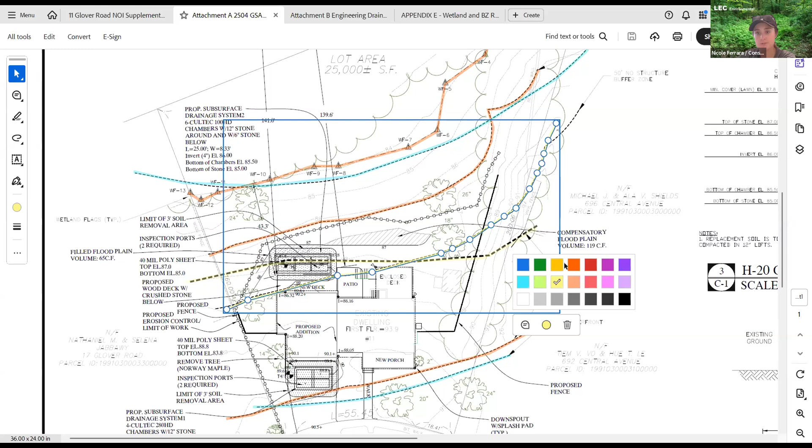So I've pulled up the plan. In orange are the buffer zone lines for BVW, in blue are the riverfront area setbacks, and in yellow we have the bordering land subject to flooding. Actually that should be orange, not yellow. So like I said, we did revise our plan.

We included the addition of a fence, where my cursor is, in black. It's going to go along the portion of the property line, connect to the sides of the house just to enclose the lawn area within the backyard. That fence will be put in the lawn. We also added a little porch in the front here, as well as shortened up this patio in the back. So those were just some minor changes that we added.

In terms of the infiltration systems, we've upgraded our stormwater management to include 2 infiltration systems. We have one in the backyard within the existing lawn, and one underneath the driveway. We have Al Gala on board. Al, would you like to add any details regarding the stormwater management?

Good evening, Commissioners. Al Gala from Gala Simon and Associates. So this is a revised plan, as Nicole has stated. Our original plan had the new driveway as porous pavement, allowing water from the driveway itself to infiltrate and at the same time offset the increase in impervious area. We later found out that the town of Needham has specific requirements for additions, that you have to infiltrate adjacent roofs to the addition. So that's what this design reflects.

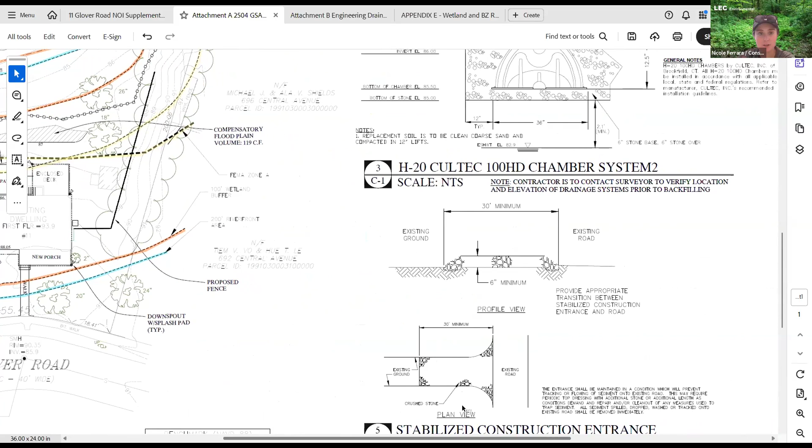It will meet the requirements of the zoning of Needham also. Great, thanks Al, took the words out of my mouth with that compensatory flood storage. Like Al said, we did include that to offset the infiltration system, and we have our flood fill comp calculations right on the plan.

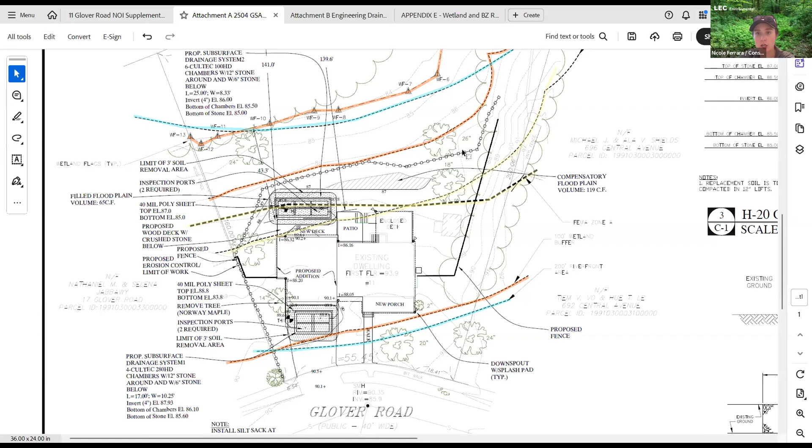And then I believe that's all the changes that we have. Just to refresh, for our mitigation we're providing stormwater management, erosion controls around the limit of work, inlet protections with silt sacks at the catch basins, and our wetland and buffer zone restoration plan presented at the last hearing, which is about 4,280 square feet of restoration of both the wetland and the 25-foot buffer zone. We're proposing permanent demarcation of that along the new lawn edge as shown on the plan. That just about covers it.

I'm happy to turn it over to answer any questions. Okay, thank you, Nicole. So Deb, do you have any comments? No, thank you for going over the changes. I don't think I have anything. All right, let me ask the commissioners. Any commissioner have a comment?

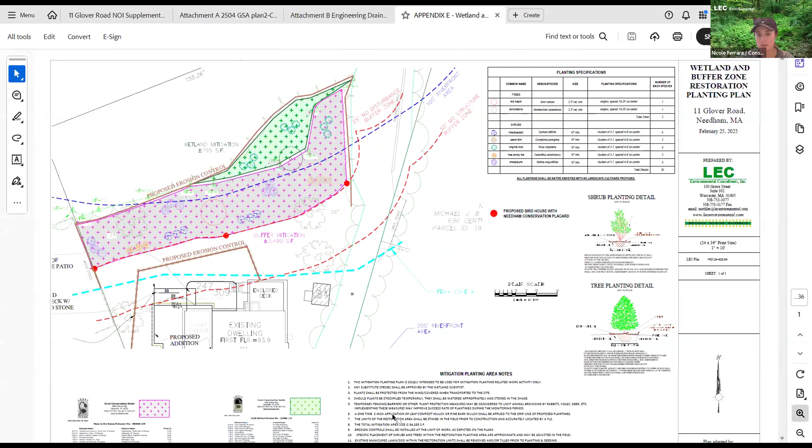Raise your hand. Fred? Yes, I can't remember, did we already see the planting plan in terms of species going in there? I vaguely remember that we did. Yep, I can zoom in so you can see it. We have all native species with no landscape cultivars. We have 2 trees to replace the 1 tree we're proposing to remove, and then 30 shrubs, and we're going to install a native fac wet meadow mix and a mesic to dry native pollinator mix.

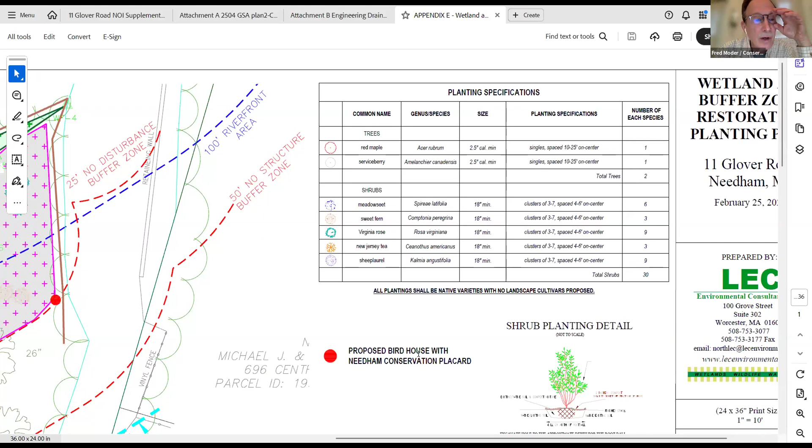Okay, what's the tree that's being compensated for, that's being taken out, what's being lost? Yep, it's a Norway maple, the one that's next to the addition. Okay, looks good. Thanks, great.

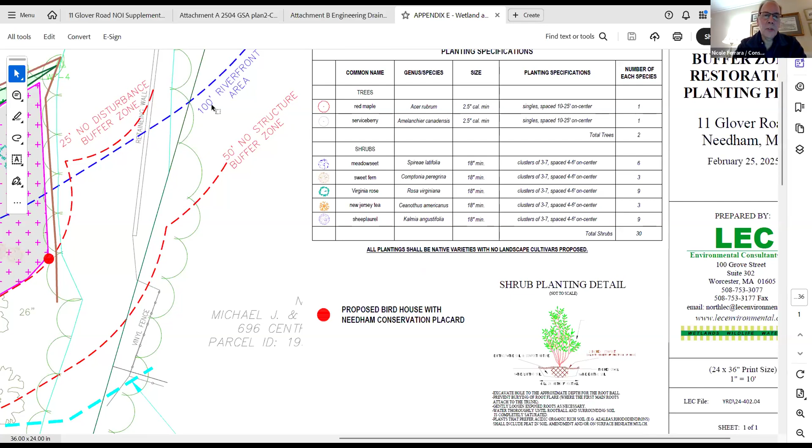Anybody else? I just have one question. In your submittal, did you do a soil test pit? I can respond to that. We did 2 test pits, pretty much at the location of our drainage systems, and you'll see them marked with, they look like targets. So the right front is test hole 1, the back is test hole 2. Okay, and yeah, I think you had a report there, right? Yes, the information is on the plan, test pit information. Yep, okay, that's my only comment.

Is there anybody in the audience that has any questions? I don't see anybody with their hand raised.

So, I have to draft this still, so it'll be ready on the May 9th hearing. Okay, so if that's the case, then we need to continue this hearing to May 9th.

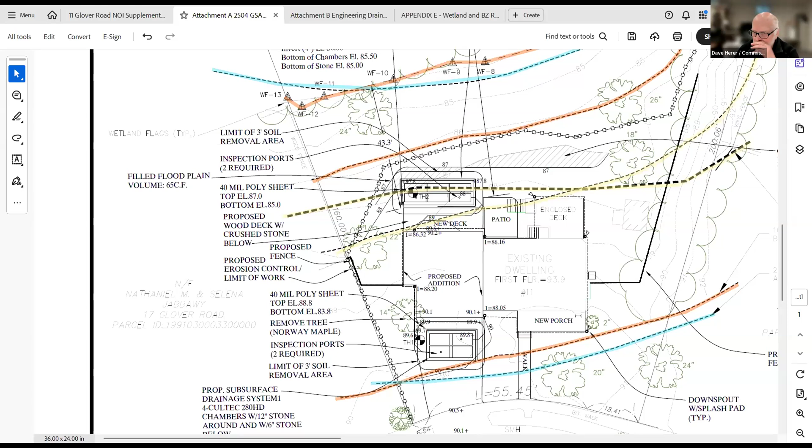So can I have a motion to continue the hearing for 11 Glover Road, DEP file 234-946, to May 9th? Motion to continue, I second. Okay, let's vote. May 8th, yeah, all right, May 8th. Bill, aye. Reade, aye. Sue, aye. Fred, aye. And chair votes aye.

All right, thank you. All right, great. Thank you, have a good evening. Yeah, good night, thank you. Okay.

Next item on the agenda is 72 Valley Road. It's a continued hearing. I believe the issue was we were looking for more detail on the grading of the site and also a listing of the species and size of the trees that were proposed to be removed.

So, Karen, hello Karen. Yep, I'm here. So we did revise the plan, we showed the topo. I can put that up if you'd like. Can I share my screen? Yes, please. Okay, here we go.

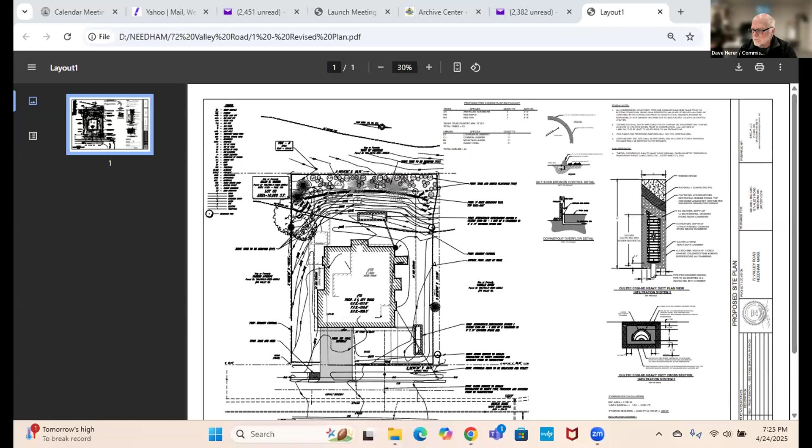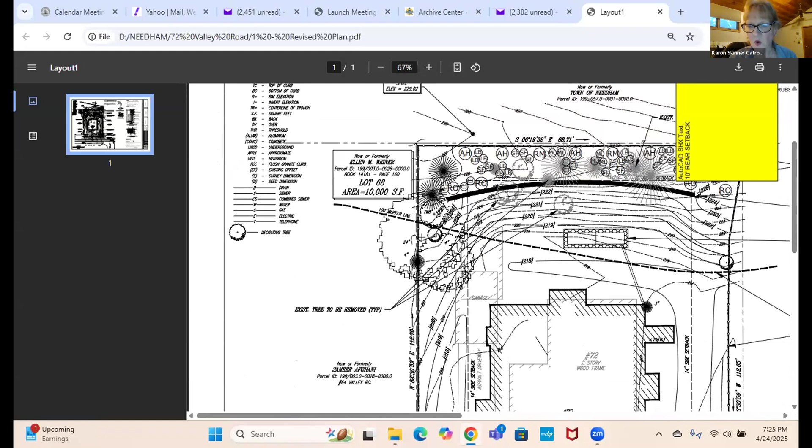So we also had trees outside the buffer zone, so we put all the plantings inside the buffer zone. You can see we're showing plants all back behind this wall. And I do have a planting list on here. So these are the plants we're proposing.

So, and I did go out and take a look at the trees to be removed. There's a 12-inch pine, 4 10-inch pines, 2 8-inch cedars, 2 6-inch pines, and a 10-inch oak to be removed. So basically pine and oak, a couple of cedars. Okay.

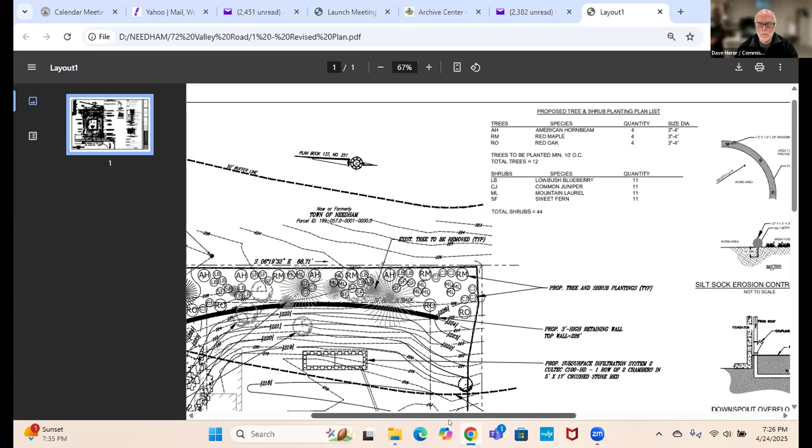Deb, do you have any comments? No, I think the planting plan looks good. I think with the topography, you have a much better idea of the existing site conditions. Yeah, any commissioners have any final comments?

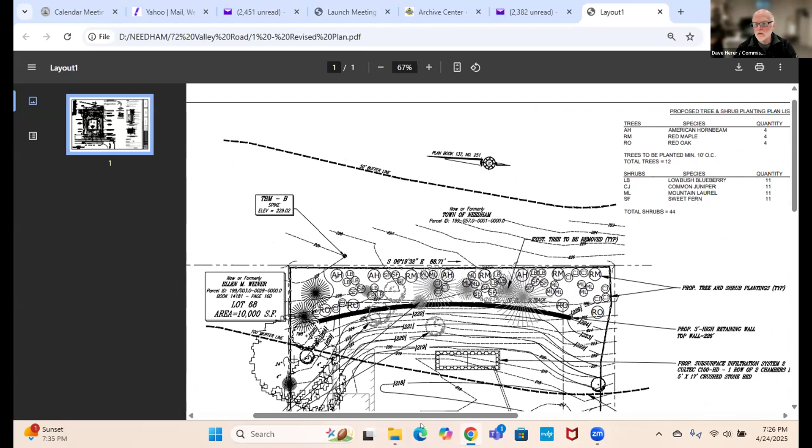Fred, is that planting area pretty wet, or is the red oak suited for the amount of moisture in the soil? It's not wet at all. Okay, thank you.

Reade, you had a comment? Yeah, the planting plan shows a size diameter, but it doesn't show caliper, so I want to make sure those trees meet the required caliper under our tree policy. 2.5, right Pilar? That's the minimum?

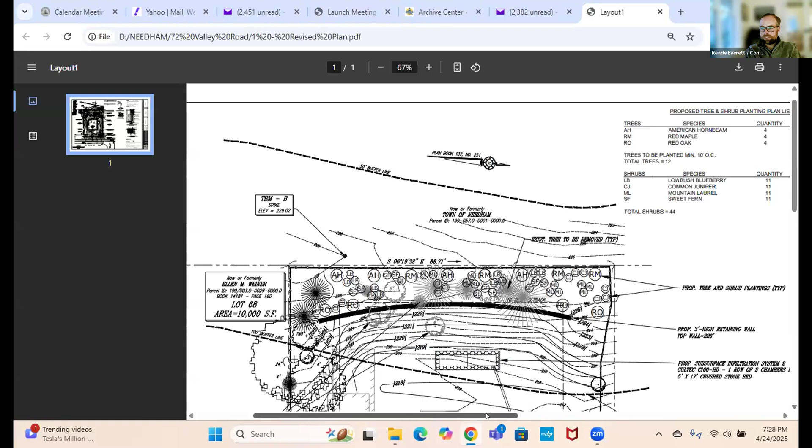Isn't that pretty much the same caliper and diameter? I think it's the same, yeah. Oh is it? Okay, pretty close. But this planting plan lists the height of the tree and not the diameter. But it says size diameter, I think, right? So I don't know, but it says size, are those inches or feet? Yeah, that's why it was unclear. If we have inches. Oh it is inches. Okay, that's fine then.

I think everything looks good. There's no other comments. Is there anybody in the audience that has their hand up? I don't see anybody. I also have to draft for the next meeting, we just got the plan a couple days ago. Okay, alright, so

Can I have a motion to continue the hearing for 72 Valley Road, DEP file 234-950, to May 8th, 2025? Motion to continue. Second. Okay, let's vote. Fred, aye. Reade, aye. Bill, aye. Sue, aye. And the chair votes aye.

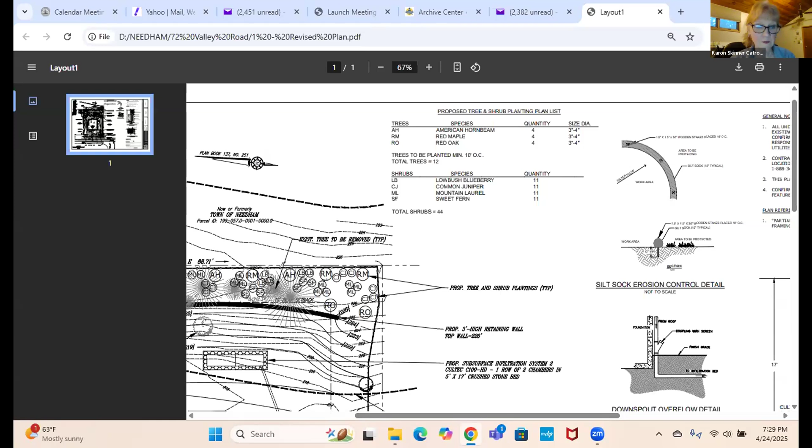1407 Central Ave, DEP file 234-948. This is a continued hearing. This is the maintenance facility for the town. I believe there were a couple changes that were made.

Somebody want to just review the changes with us? I'm Hank Haff, Director of Building Design and Construction for the town, and we have a team from Weston and Sampson that can go through those minor changes. Tyler, maybe you want to start? Yeah, I can give the summary. There are a couple of minor changes, and I'll just share my screen and walk through them visually.

Alright, so my name is Tyler Cofelice, I'm the project manager for Weston and Sampson, and this is for the fleet maintenance garage.

The couple of changes we made were: the original plans showed the generator in this location where the dumpsters are now shown. We did a sound study that showed it was too close to the property line, so we had to find a location back here and add a sound wall to help mitigate sound traveling from the site to the neighbor's property.

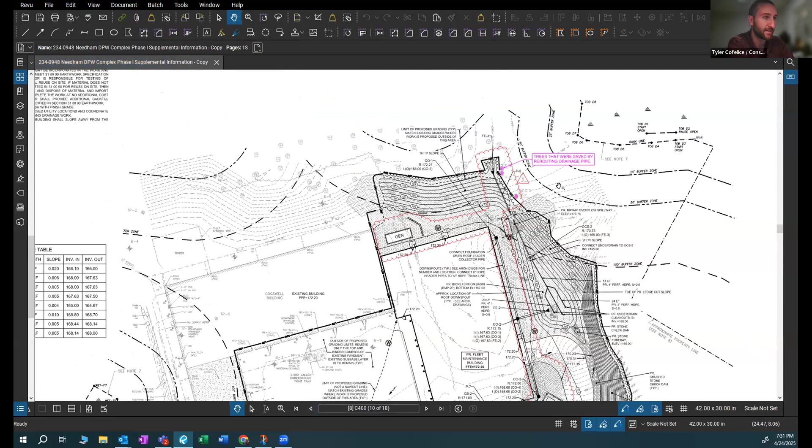And then, as mentioned previously, we did relocate this discharge pipe. That was to save a couple of trees, and I did highlight them right here. Originally these 3 trees were in the path of this pipe, it originally terminated right around here. So just by shifting the direction of the pipe, we were able to move it out of the way of the trees.

Those are the main changes. I believe it says there's an addition of a perimeter stone drip edge. Oh yeah, that's just shown right here. Okay, yeah. Okay, thanks.

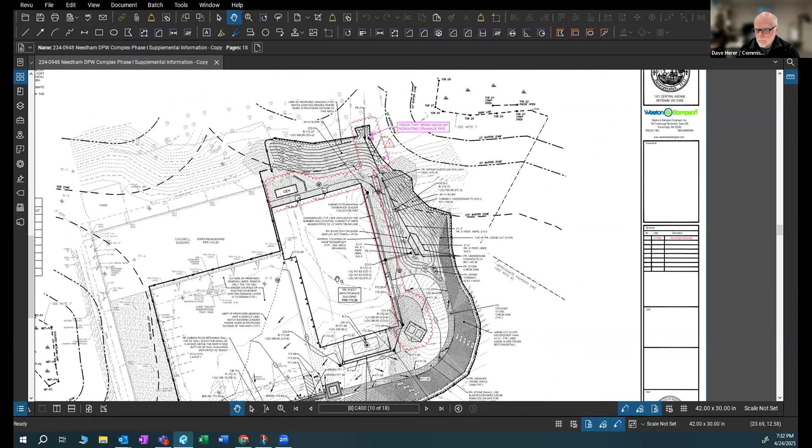Any comments, Deb? Nope, I do have a draft of this for us to review. Okay, any comments from the commissioners? Yeah, I think we had a pretty good presentation last time of the project, so it doesn't look like you're making any substantial change. No comments from the commissioners. I don't see anybody in the audience to comment, so I would

Suggest a motion to close the hearing for 1407 Central Ave, DEP file 234-948. Motion to close the hearing. Second. Okay, let's vote. Fred, aye. Reade, aye. Bill, aye. Sue, aye. And the chair votes aye.

And we'll take up the order of conditions in a few minutes. Okay, thank you. Thank you.

Okay, the last item on the written agenda is 293 Rosemary Street, DEP file 234-949. This is a continued hearing for notice of intent. Who do we have representing this project? Russ Waldron, me, yes. Okay, I'm going to pop the plan up here. Okay, Russ, thanks.

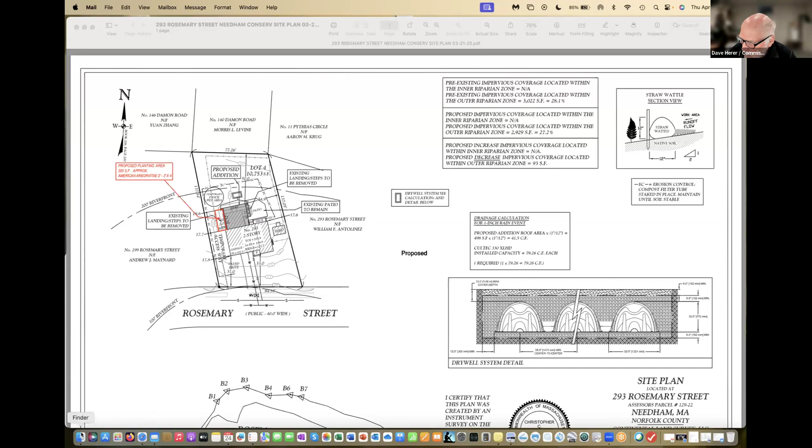Okay, if there's no further comment, and it doesn't look like there's anybody in the public audience, then I would take a motion to close the hearing for 293 Rosemary Street, DEP file 234-949.

So moved. Second. Okay, let's vote. Sue, aye. Reade, aye. Bill, aye. Fred, aye. And the chair votes aye.

Okay, thank you. Thank you. Thanks.

All right, there's no other listed items on our agenda, but I think we had a couple last minute things to discuss. One was the property on—yep, so we do have Scott Morrison, who's the wetlands person for 484 Charles River Street, to talk about their mowing schedule. Okay, go ahead, Scott.

Evening. If you recall, we had filed a notice of intent and received an order of conditions for the mowing at 484 Charles River Street back several months ago. At that time, I believe the commission's concern was relating to turtles, so they put a condition that indicated March would be the preferred mowing schedule.

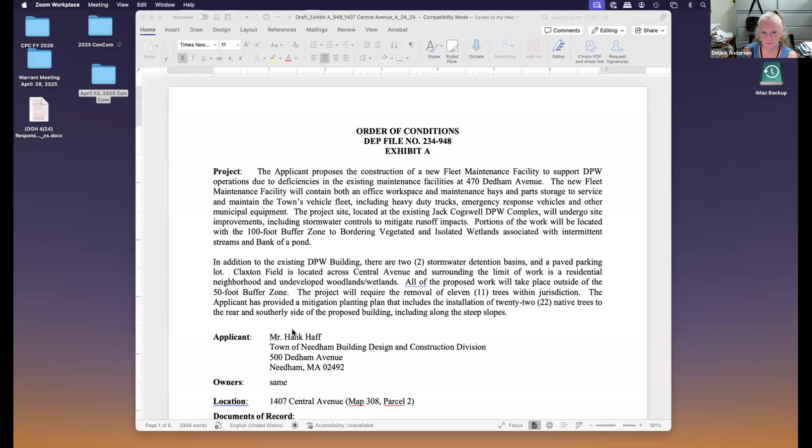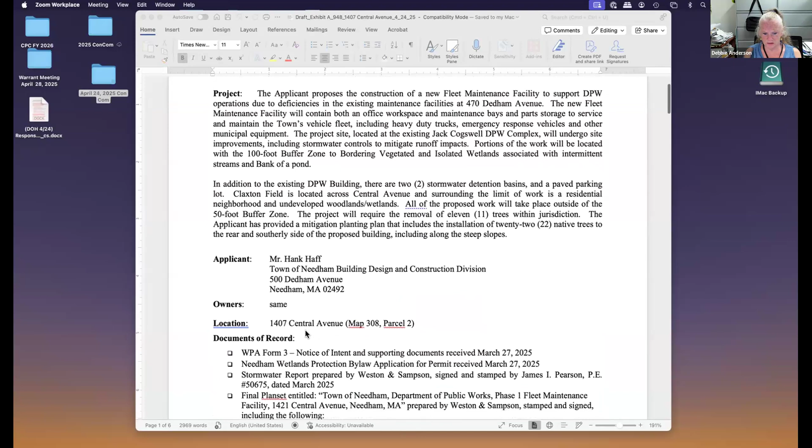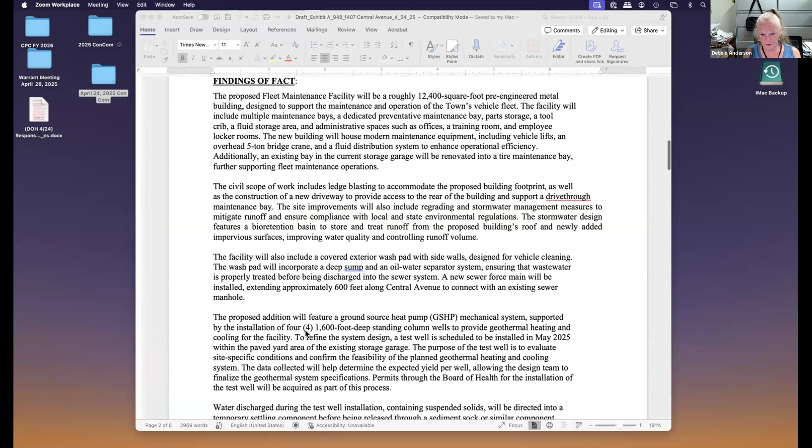So, long description, but they are doing no work within the 50-foot buffer. They are removing 11 trees and installing 22 trees. You can keep going. Yep, those are all the sheets. That is just the project description. Keep going.

So down the special conditions, Dave, you had drafted this new pre-construction special condition, number 7 there. I highlighted that because I added it - that they need to record the stormwater management O&M plan.

Just to be clear, that's something that is going to be in the revised stormwater bylaw or regulations, is that correct? Yes, we're just trying to get ahead of the game here.

Yeah, because we had it as they couldn't get their certificate of compliance, but we want to have it recorded at the registry right at the beginning, along with the order of conditions, right?

Right. Then I think they should mark the trees on site that they're planning to remove, and I can go out and take a look at those during the pre-construction meeting. And then we have tree protection to be installed and maintained around any tree that's to be maintained, that could be impacted during construction of the project.

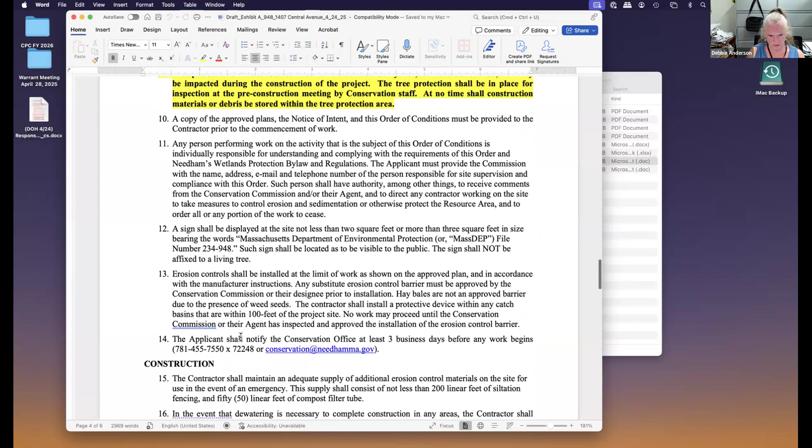Those might have been just that they should have extra erosion controls available on site, in case there's any breaches or issues with that.

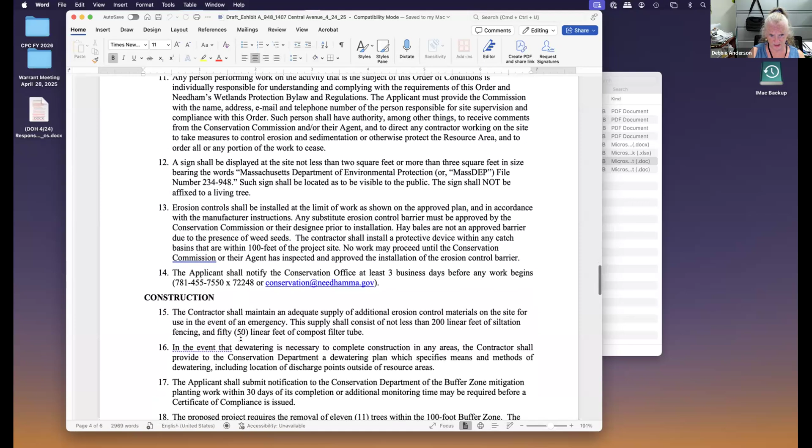Then let us know about the planting within 30 days of the installation. We have the planting plan, that has the 22 native trees they're going to be planting. Keep going.

Then we have the plant monitoring requirements. And the stormwater management system must be inspected and maintained in accordance with the approved long-term pollution prevention and stormwater operation and maintenance plan prepared by Weston and Sampson, and that should survive the issuance of the certificate of compliance.

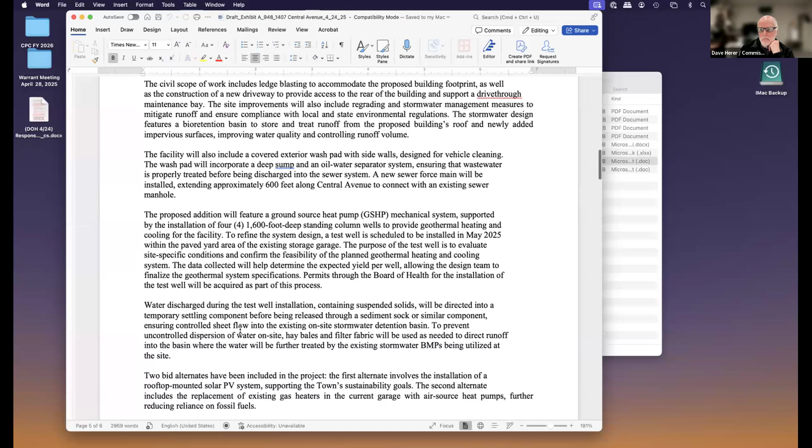And that's what I had, unless you wanted to add any other special conditions. Looks good. Anybody have any comments? Looks good. Okay.

All right, can I have a motion to approve the order of conditions for 1407 Central Ave, DEP file 234-948? Motion to approve. Second. Okay, let's vote.

Sue, Aye. Reed, Aye. Fred, Aye. Bill, Aye. And the chair votes aye. Okay.

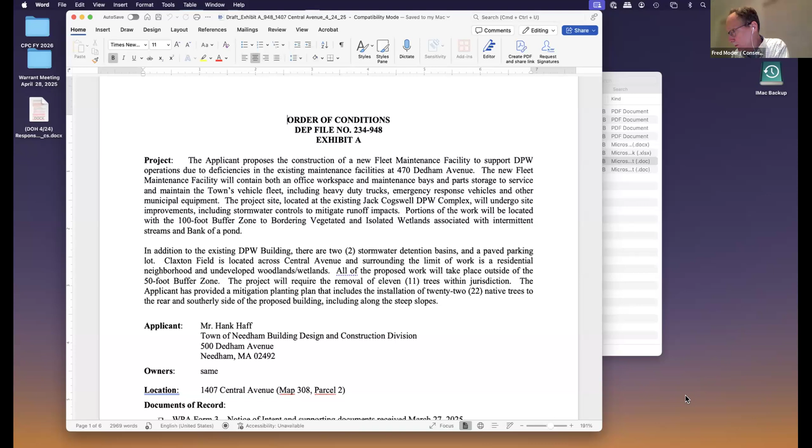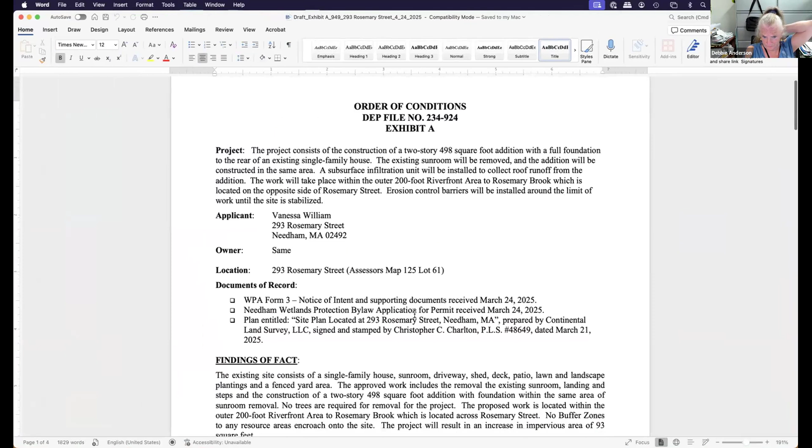Next one is 293 Rosemary. So this was a pretty simple project. As you know, they're removing the existing sunroom, putting in the addition. They added the subsurface infiltration, the mitigation planting area.

Special conditions, I don't know if I had anything worth noting besides our normal conditions. Did I highlight anything? Did they provide their maintenance plan, O&M plan for the stormwater? I don't know, I can't remember. Yeah, I can't either, I'll make a note.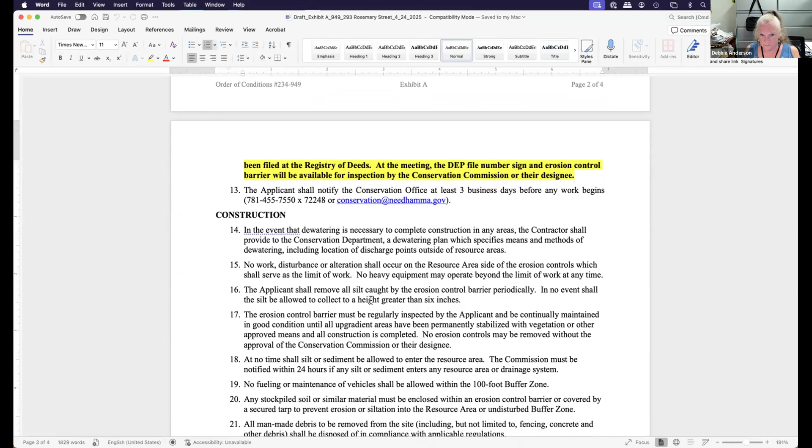Yeah, if they haven't, then they should. It should be part of it. All right, so they do still have to do their test pit, so I have that special condition.

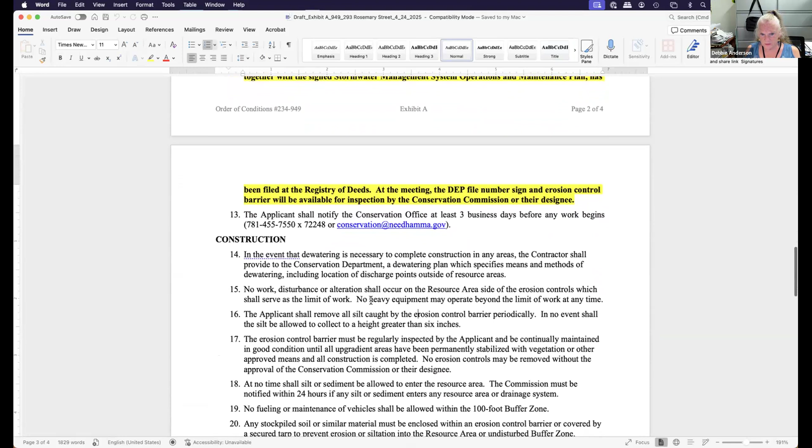Keep going down. Prior to commencing the order - yeah, so that talks about the stormwater. So that has highlighted your new rendition of that, talking about the stormwater O&M plan and having it recorded at the registry.

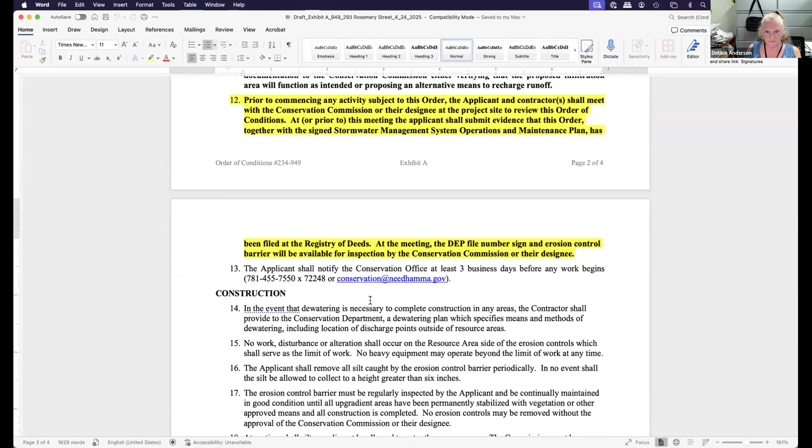Yeah, but if they haven't submitted it yet, what do we do? Well, I will tell him that we need to receive it before I'll give them the order, it doesn't have to be that complicated. I was thinking we could maybe post an example for a simple O&M plan, for just a residential infiltration system.

Okay, do you have one you could put together? Yeah, and then it would make it easier for some of the applicants. Yeah, for some - because people do ask me for them off and on.

Yeah, some like the DEP garage, that's a little more complicated, but anyway. Yeah, I'll do that when I get a chance. Okay.

All right, other than that, looks good. Any comments? No? Okay.

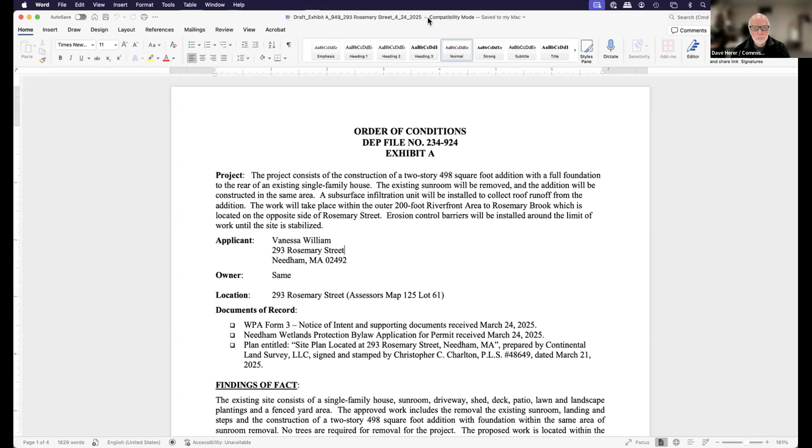Anything else, Deb? I don't think I have anything else. Okay. Any of the commissioners have any last minute thoughts? Good luck in town meeting.

Number 21, warrant 21. I'll be up in the rafters on our project. I think there's some good support, so on the 30th, next week, we're having a Zoom call with the people we had on our volunteer list, so hopefully we'll get a good turnout there.

I've been talking to the Boy Scouts, and one troop has identified 3 scouts that are interested in doing a project. So I'm looking at creating a piece of the big project that meets the criteria for an Eagle Scout project.

So, we'll get them involved. We posted something up at the high school, but I haven't heard from anybody up there yet. Dave, do you think it'll be Monday night or Wednesday night?

Was it the 30th? The town meeting. Oh, the town meeting is Monday, the 5th. Just wondering if we think we'll be on that night or if we'll go on to... oh, that's a good question.